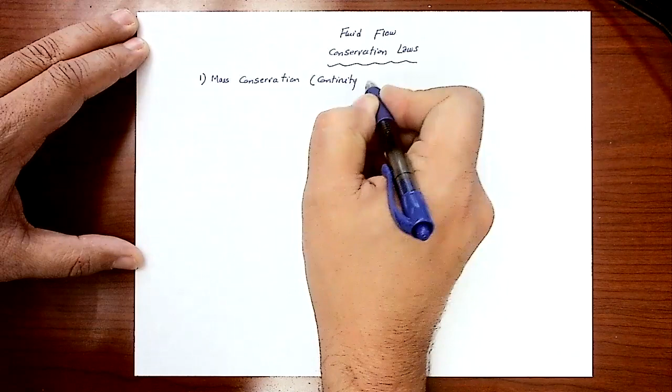To derive that equation, we are going to assume that we are dealing with a three-dimension fluid element. There's a very simple cubical shape fluid element.

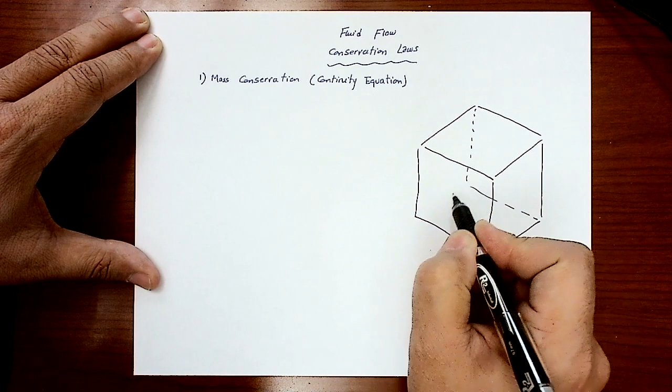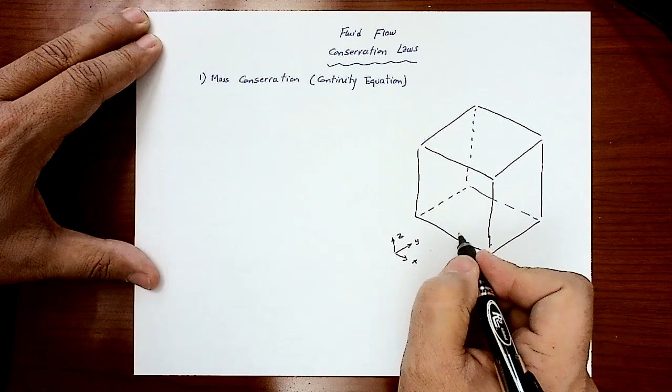We're going to set up the coordinate system. This is X, this is Y, and this direction is Z. The side length of that cubical element is dx in the x direction, dy in the y direction, and dz.

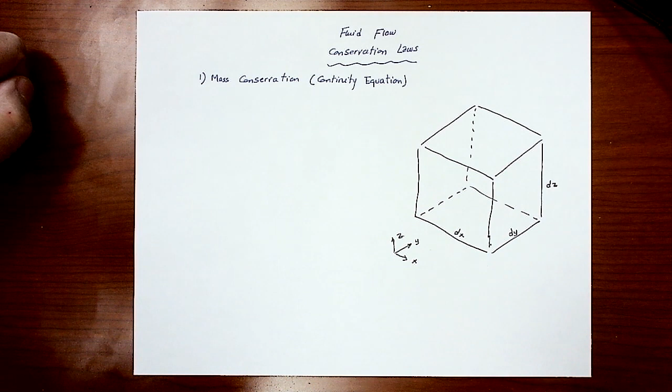Now we're going to look into the x direction first. Then we can project the results obtained in the x direction into the other directions, y and z. Then we can combine all of these findings to come up with one equation that describes the three-dimension flow of that fluid within that control volume, or through that control volume.

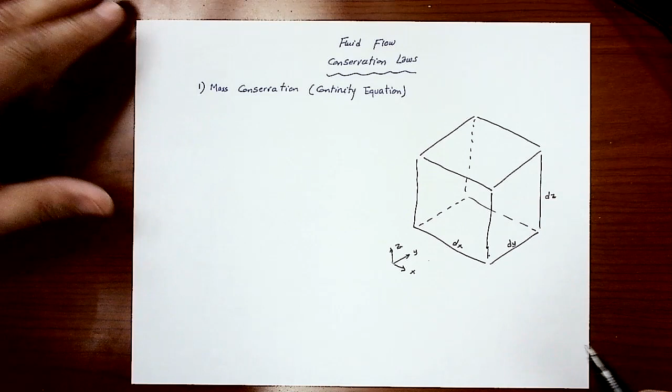So I would go back to the back face here that has a dimension of dy and dz height. Then I will assume that there is a certain quantity of mass coming into that face, and I'm expecting to have another quantity of mass going out.

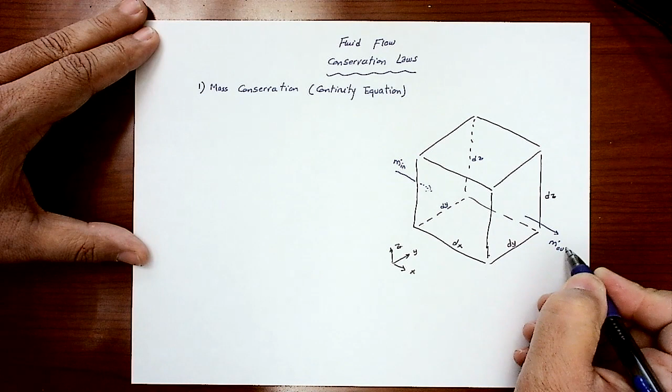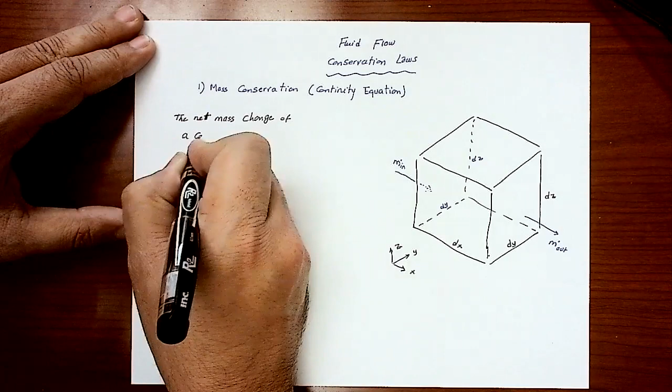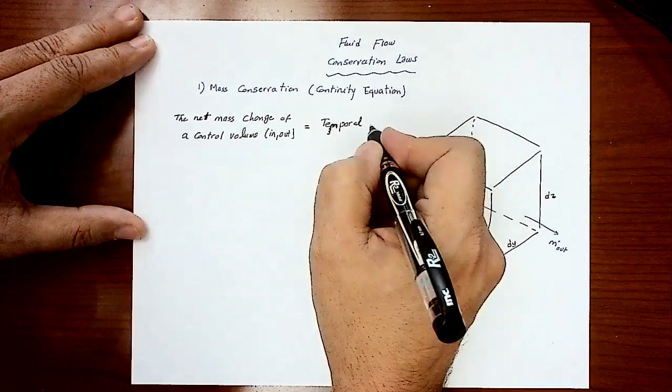The mass conservation, or the conservation law, states that the net mass change of a control volume, in and out, should equal the time change, the temporal change, of mass within the control volume.

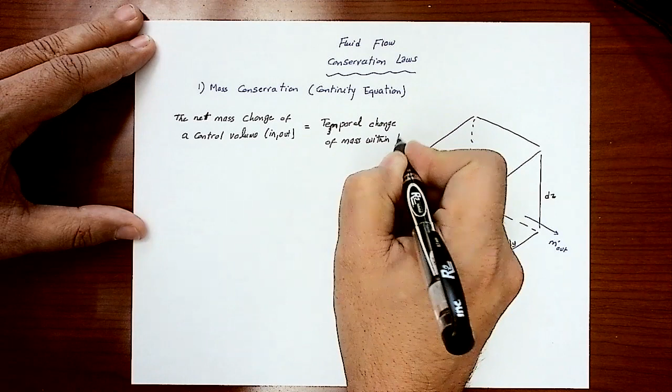Okay, so let's look to the analysis of the mass coming in, mass leaving out. As we know, mass flow rate, in a simple scalar calculation, is the fluid density times the flow area times the fluid velocity. This will give us the mass flow rate. If you look to the unit, density is kilogram per cubic meter, multiplied by the flow area, which is meter square, multiplied by meter per second. You will find yourself ending up with kilogram per second.

That's the unit of the mass flow rate if you are using the SI unit - pound mass per second, pound mass per hour, if you are using the imperial or British unit. So this equation is telling me that if I look into the x direction...

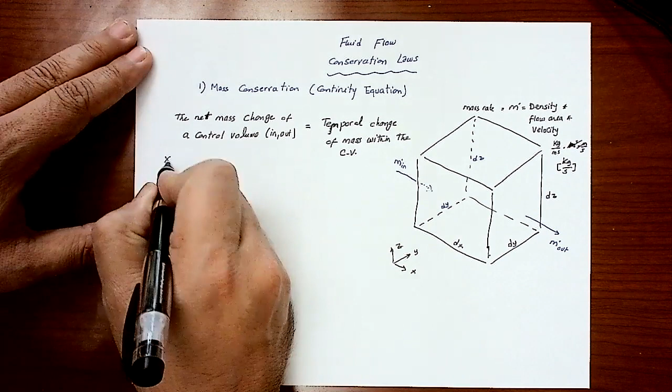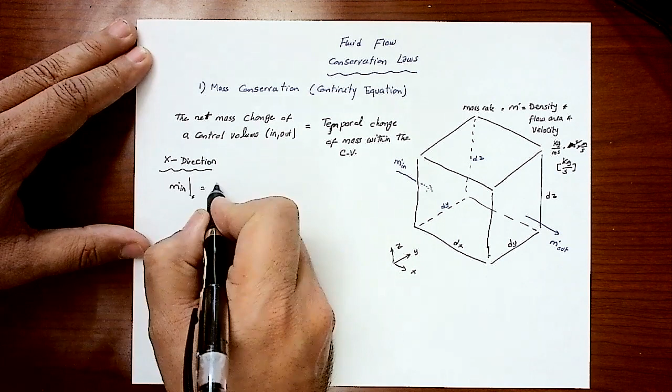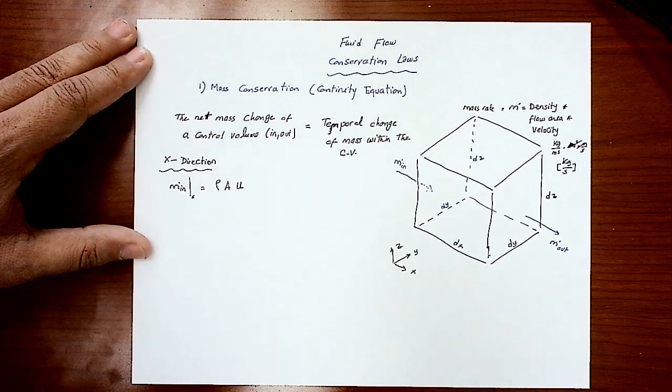Let's get the mass flow rate in the x direction. It will simply be rho times the flow area in the x direction, times the velocity in the x direction. The velocity vector will always have three components: u in the x, v in the y, and w for the z direction. Since I'm dealing with the x direction, I'm going to call that velocity u.

Since I'm dealing with a very, very tiny control element or fluid element, I'm going to call that area dA. So this can be written as rho u dA. And the area is the flow area, and the flow area from this graph is shown to be dy dz. That's the dA value. So the mass flow rate in the x direction is simply rho u dy dz.

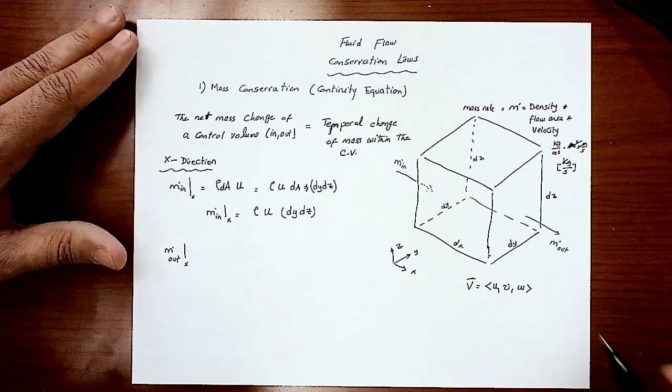Now let's look to the mass flow rate leaving that fluid element, m dot out in the x direction. In simple language, whatever is coming out of that face is related to what was coming in, right? So whatever is coming out should equal the mass flow rate in, in addition to some variation. So it's maybe the same quantity in plus something, or the same quantity in minus something.

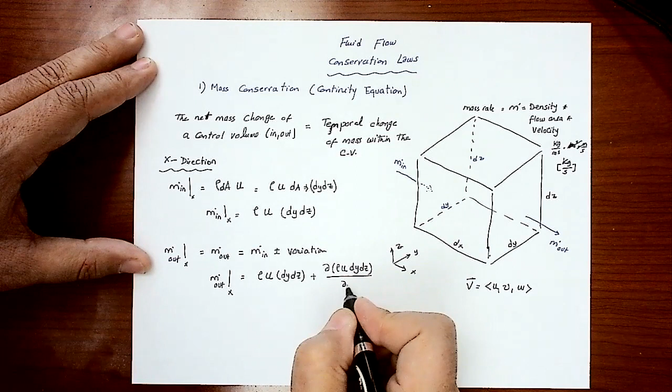So you will end up having y and z totally constant, but since we are developing the generic equation, I will keep rho and u as variables relative to x. So this will actually be partial rho u by partial x, and y and z for sure are constant relative to x. So I'm going to end up having dx, dy, and dz.

So now if I want to get the net mass change in the x direction, this would simply be the difference between the mass flow rate in and the mass flow rate out. So m dot net in the x direction - this is equation 1, and this is equation 2, we'll get equation 1 minus equation 2. The first term here will cancel out, so I'm going to end up having minus partial rho u by partial x, times dx, dy, dz.

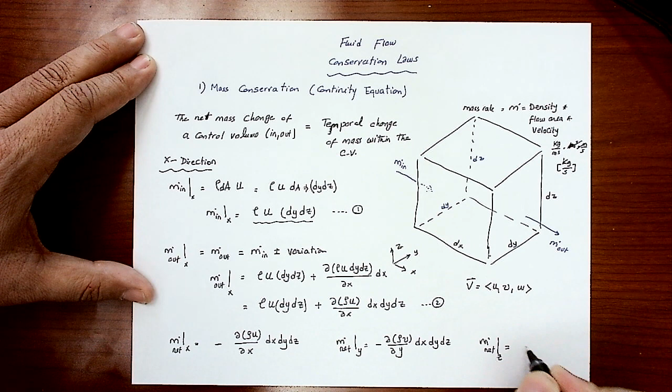If you project that into the y direction, m dot net in the y direction will simply be minus partial rho v by partial y times dx, dy, dz. You do the same in the z direction: m dot net in the z direction will be minus partial rho w by partial z, still times dx, dy, dz.

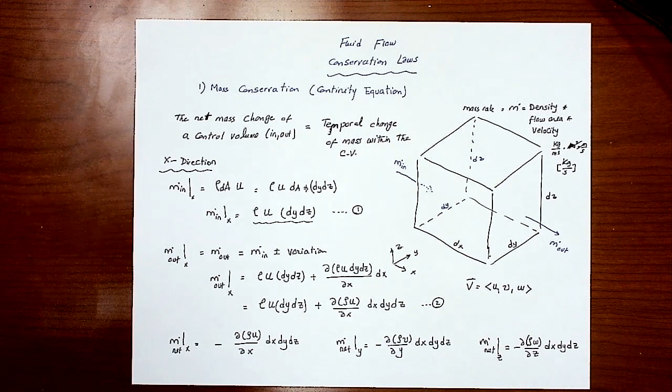If I want to get the net mass change of that control volume in all directions, I simply add up the 3 components. So the left-hand side of this mass conservation equation will be minus, as a common factor, dx dy dz also a common factor, times partial rho u by partial x plus partial rho v by partial y plus...

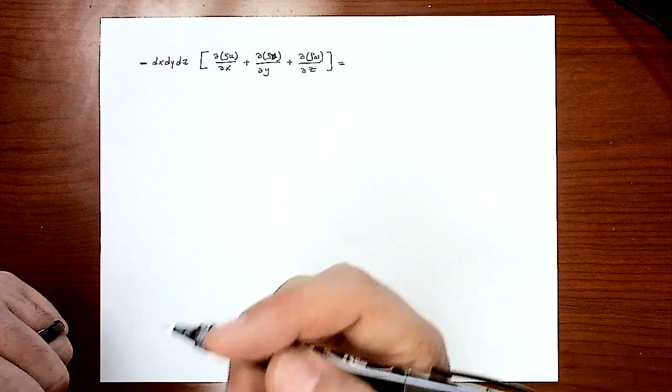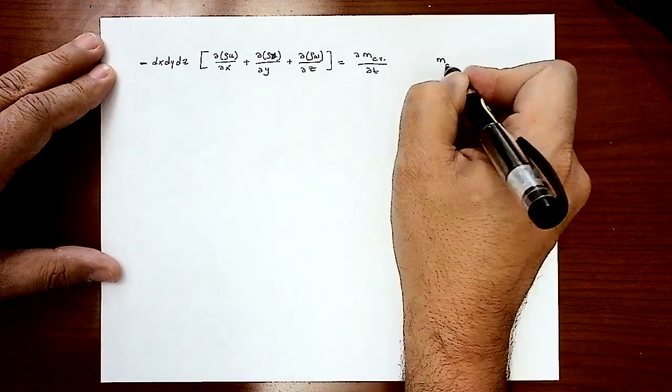...partial rho w by partial z, and this should equal the time change of the mass inside that control volume, which is the partial derivative of the mass within the control volume with respect to time. The mass inside the control volume is simply density times the volume, so rho times dx, dy, dz. Substituting on the right-hand side, I end up with partial rho by partial t, multiplied by dx, dy, dz.

You notice that dx dy dz is repeated on both sides, so I can cancel it out. This is a negative term, so I'll bring it to the right-hand side. The final equation will be: partial rho by partial t plus partial rho u by partial x plus partial rho v by partial y plus partial rho w by partial z equals 0. This is the general equation.

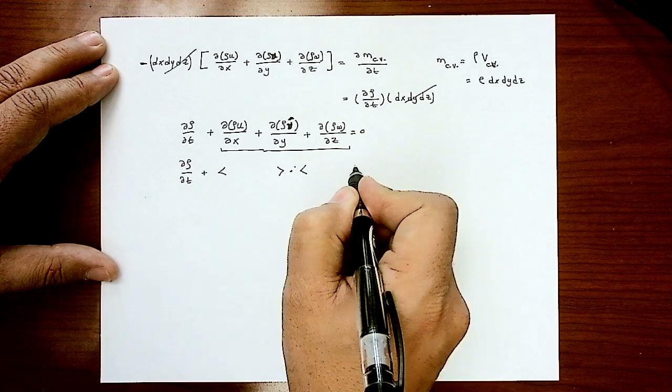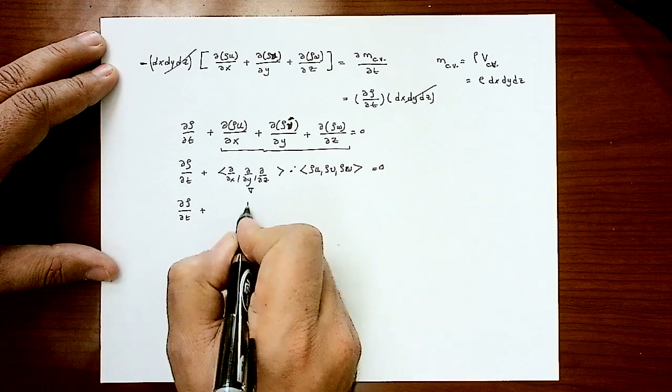I can simplify this: partial rho by partial t plus, since this is a scalar value, it can be broken into the dot product of two vectors - partial by partial x, partial by partial y, partial by partial z, dotted with rho u, rho v, rho w, equal to 0. I can rewrite this using nabla, so that's nabla dot of rho times the vector v, equal to 0.

So this is the mass conservation law, the general equation. Then you can start deriving special cases out of that equation.

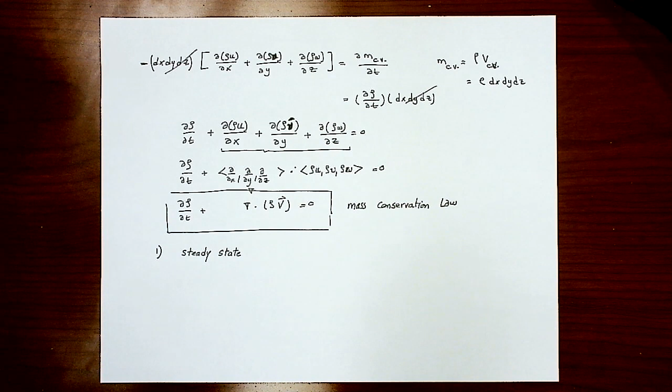For example, if we are solving a steady state case - in a previous video we explained the meaning of steady state or steady flow, meaning that your thermophysical properties, your velocity, your density, whatever it is, nothing changes relative to time. So for steady state, anything relative to time is constant, not changing. So this term should be 0.

So I end up having nabla dot of rho and the velocity vector equal to 0. This is the steady state continuity equation. What if, in addition to steady state...

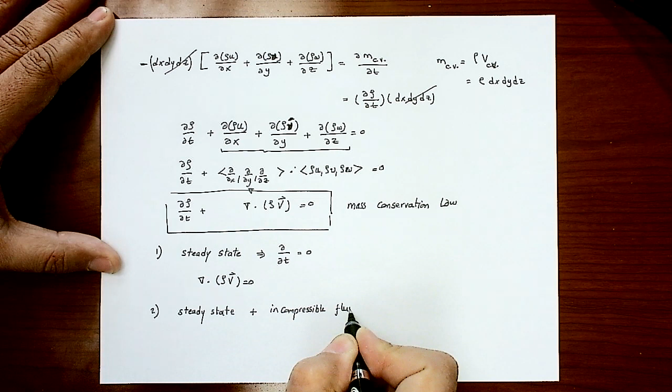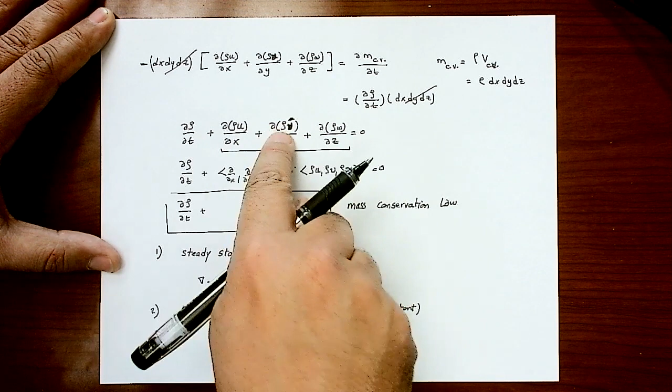...I also assume that I'm dealing with incompressible fluids. If I'm dealing with incompressible fluid, this means that the thermophysical property like density is not going to change, so rho is also constant. It has no meaning to include rho inside that derivative - it's not going to change, it's always constant, so it gets taken out of the differentiation. On the right-hand side it's 0, so you end up simply having nabla dot v equal to 0.

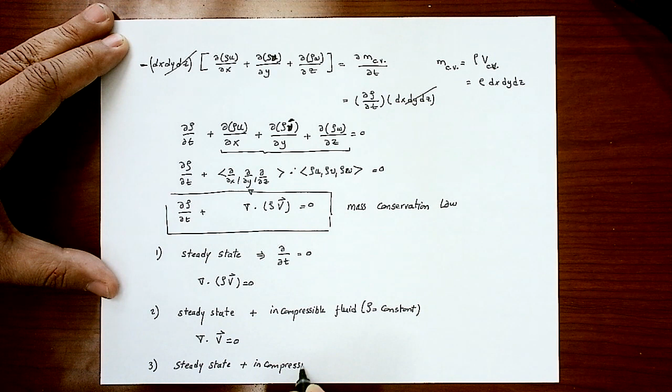Remember, v is a 3-dimensional vector, x, y, and z. So the final special case I can derive from this equation is steady state for incompressible fluid. In addition to that, you are solving a one-dimensional problem. In this case, you end up having only the derivative in the x direction - it could be x, y, or z, but to be more realistic that's the standard case. So I end up having partial u by partial x equal to 0.

And this is the shortest equation for continuity under all these assumptions, and that concludes the mass conservation equation derivation as part of the conservation laws.